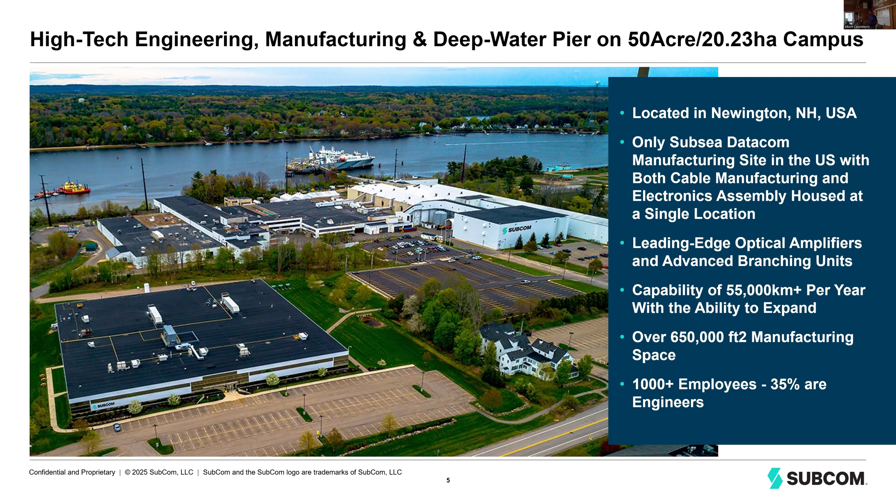So we're right up the road. We have over 1,000 employees, many of them engineers. But we don't just make cable, we also install cable, and I can talk about that here.

Our experience: over 1,000 employees, innumerable patents, so many networks, and we've deployed enough cable to circumnavigate the globe 25 times. I believe we've just hit 1 million kilometers deployed. We do things in kilometers.

Again, I myself have had a journey where I landed cables, I've been to over 40 countries landing cables. We also have 9 ships and a plethora of other material like ROVs and plows to help us protect, bury, and inspect our lines.

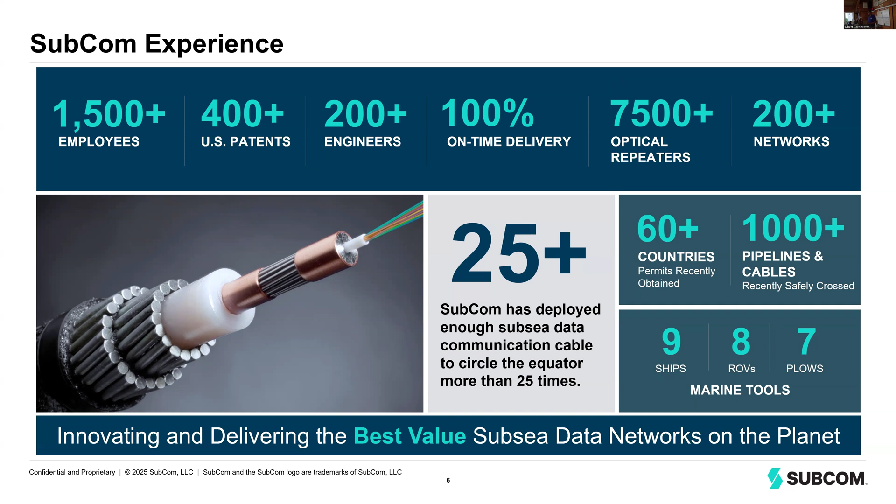Now, what does it take to build and install a subsea network? It's a massive effort.

We have, from the very beginning to the very end, so many different diverse backgrounds, majors, people coming from different walks of life, serving key processes and roles in any of these fields you see above.

So you have engineers doing modeling of these subsea networks. You have optical design. You have desktop study, which is more of a marine study - sonar, survey work.

You're doing liaison with local fisheries, because we don't want to lay these cables anywhere there's anchorages or marine mammal sanctuaries, things like that. So all this needs to be planned ahead. We need to ensure that wherever we're laying our cable from point to point, we're avoiding things that can hurt the cable or the environment.

Then from the planning stage it goes to permitting, a massive permitting effort. You can't do anything without having your proper permits in place to lay cables, especially considering we are in a very delicate marine environment. It's a beautiful island here, Avalon and Appledore. We need to have all our permits in place before we do anything, and survey as well goes into that. Once we have a general idea of where our route is, we have folks do survey.

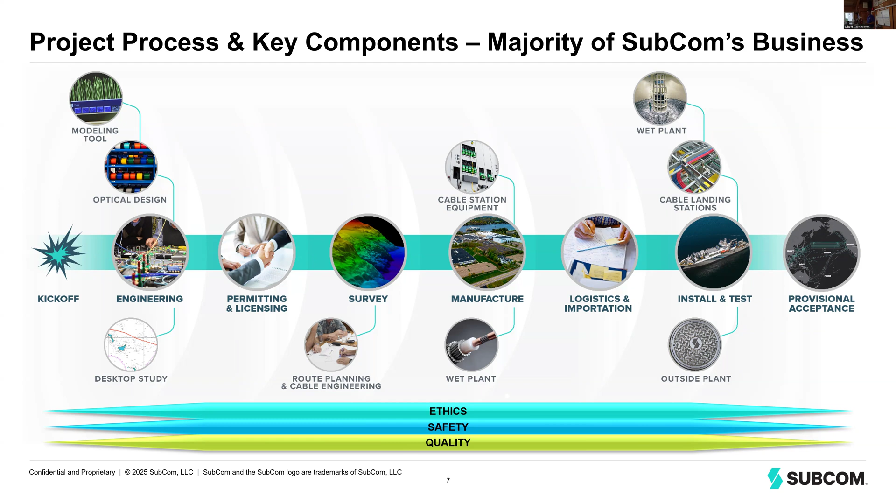Then it goes to our manufacturing phase, where we again get into who we are and all the different people we involve in this project. All the manufacturing that happens here in New Hampshire. We also have our logistics folks, our vessel folks who do the installation themselves, like me, who do the installation on shore. And eventually, after it's all installed, we need subject matter experts who are able to test it, so photonics engineers, people who have a background in testing and things like that come in. But what I want to restate is that we may have folks from different backgrounds, from environmental engineers, electrical engineers, and techs.

You may start your career in one specific area, but as a material science engineer myself, I've been able to jump around and do different things at SubCom. All the study paths you see on the left, there's no direct line to something analogous at SubCom in the long term. You can jump around. You have permitting people who have marine backgrounds. You have contract management people who started in shore ends. You have any number of different pathways in a company as big and diverse as SubCom, with all the different things that let me do every day.

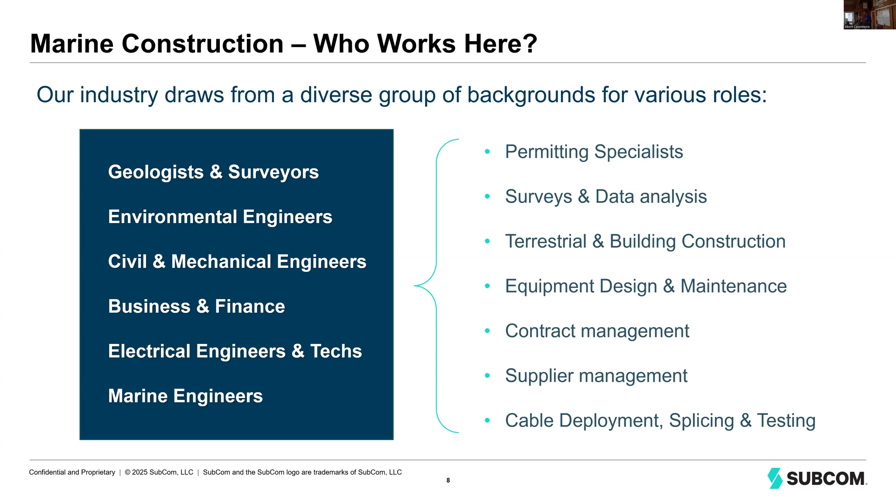In fact, currently we even have 12 summer interns from UNH, although I understand we have a lot of different universities and locations represented here on the rock. SubCom's hired multiple UNH interns, but also interns from other colleges in the area and out of the area, from engineering backgrounds, mechanical background, oceanographic studies, even business administration. As a company like SubCom, you have the ability to start and jump around to any number of cool things.

So Chris and Jen and some of our folks, Debbie Brask, some of the folks at SubCom, we really love our relationship with UNH and with students who have been interns and even have stayed on to work at SubCom for many years.

Overall, SubCom as a company is one of the leaders in these subsea fiber optic systems, manufacturing and installing them. In fact, this island is part of an oceanographic system that has hydrophones on it, listening for nuclear tests. So it's not just telecommunications cables, it's anything that needs a connection through the oceans. We're able to keep them. Okay, that's who's up.

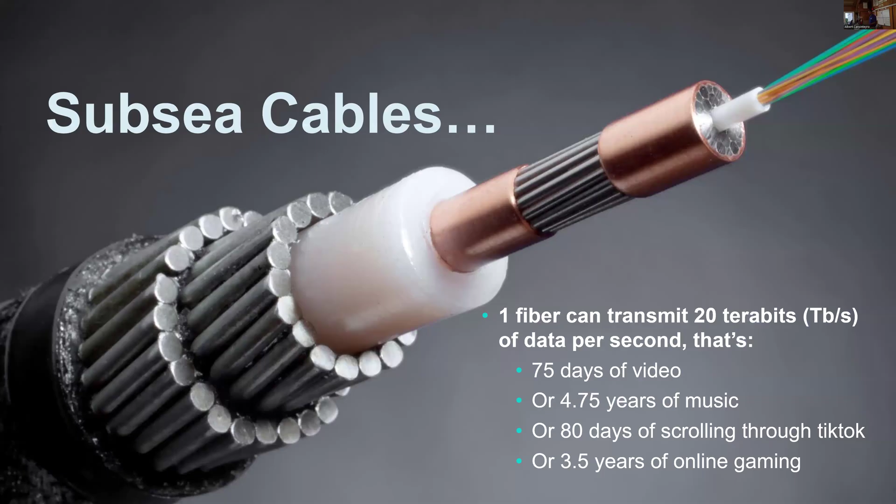That allows us to communicate so much more data than just going one signal at a time, because all these signals are traveling at once - this is all live, real time. So what that means for the internet in general is one fiber can transmit 20 terabits of data per second. As you can see on the board here, that's 75 days of high-def video, 4.75 years of music, 80 days of scrolling through TikTok nonstop, or 3.5 years of online gaming, per second, one fiber.

Now, our cables can have 4 fibers, 12 fibers, 24 fibers - what are we up to now? 24 fibers. So that is the backbone of the internet as far as getting your ones and zeros from A to B.

So you can cram as many channels as tight as you can, and your only limits are a bunch of weird physical interactions that happen, plus all the technology you have on either end to decode and separate these signals into their separate channels. If this interests you at all, go grab your resident physicist or optical engineer and shake them and ask them to tell you more, because it's really, really cool stuff. It's something I didn't understand before I started the job, but now I have a little bit of understanding.

The fiber, each fiber, you've probably seen the fiber optic samples on your desk, the size of a human hair. So we have DA cable landing on the beach. How do we make it? We get fiber, and this is all happening at our plant here in Newington.

We get fiber on spools. We take that fiber and put it inside a loose tube, gel-filled, that protects it from any water leaks or things like that. If the cable gets hurt or breaks, it's going to slow down the watering. This is the loose tube, you can probably see it on your samples, a very small portion of it.

After it gets through the loose tube, it goes in an armor wire packet, and then it gets a copper conductor pressed and welded around it. The copper conductor is there to power the amplifiers that I showed you.

Then it gets a layer of polyethylene, the white plastic you see on your cable samples. That poly package is the cable center package. That's the cable that's in deep water. You don't need anything other than that. Everything else we add after that is only for protection we need near shore, for the event of anchors or excavation or something.

The armor wires get spun off onto massive spools. This is happening 24/7 mostly in our cable factory in Newington. We've made the most cable we've ever made so far this year. Then ultimately it gets wrapped in a fabric wrap with some tar, bitumen kind of substance to give it some handling characteristics, so when we lay it, we have a good grip on it.

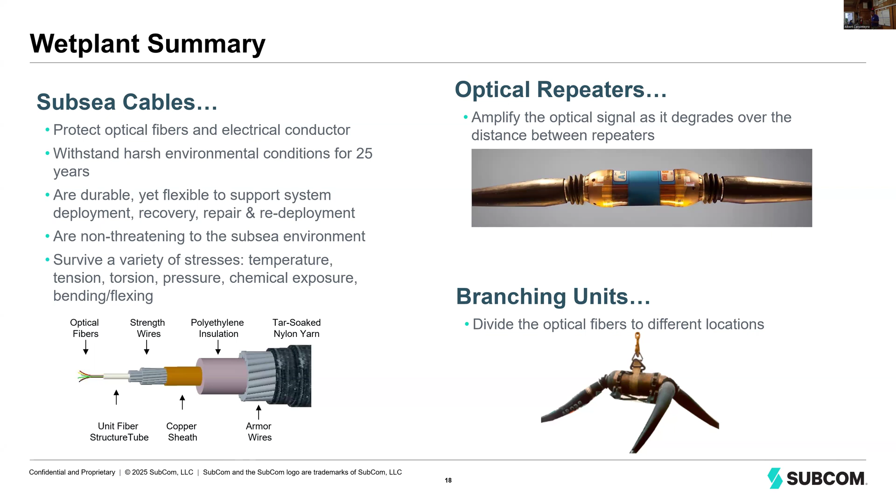So yeah, building networks involves also the repeater manufacturing that we do at the factory, some of the network assembly and some of the testing. It's a massive facility, and it's pretty much all this stuff.

So I haven't lost everyone yet. Let's talk a bit more about marine installation. We've built this network, surveyed it, manufactured all these repeaters, and we have all the design down. We know how many bits are going here and there, what the ratio is, how much each branching unit needs as far as capacity. We've done all that. Now we need to put the cable on the vessel, land it like we did here in April, and then lay the cable and repeaters on the seabed. Most of the cable and repeaters, again in deep water, are all laid on the ocean floor.

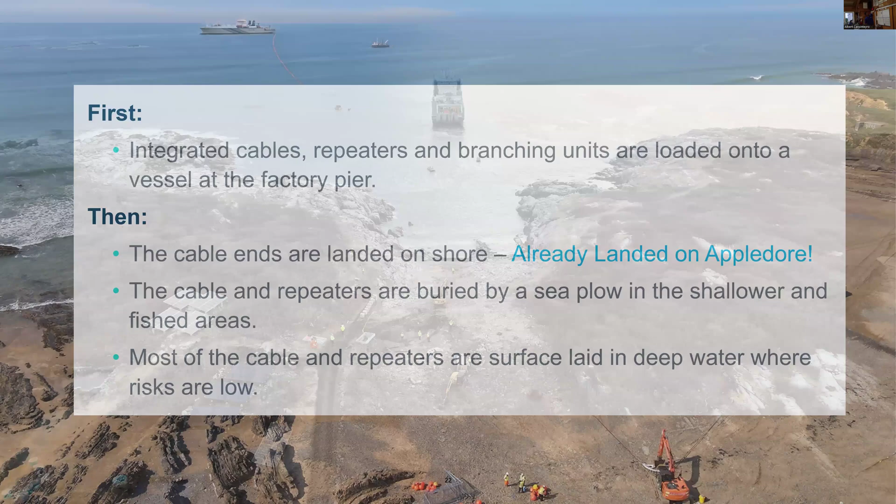This is actually a shot from April, where I'm out here on one of the small boats, to the left, down here. There's Broad Cove. On the left-hand side you'll see a small concrete square, to the right of the little orange excavator, that is the beach manhole. So that's point A, as it were.

And the cable ship offshore is currently feeding us a messenger line. Divers have come out to the boat, grabbed a line, a hauling line, and brought it to shore. We're waiting for our excavator with our winch to start pulling the cable. So we've got the messenger line in.

Then the end of cable is attached to the messenger line. The cable is then hauled in. I've got a couple other photos of that coming up. The divers are there.

It's a long day, but landing day is probably one of the most important days for me as a shore end guy. It's the culmination of a year plus of planning. We're not just doing this in beautiful sunny New Hampshire weather in April—sometimes we're doing it off the coast of some tiny atoll with a hurricane coming in. You have to plan these things much in advance for every condition.

So in any case, there's the cable vessel. We have 6 of those and 3 others, of a different class of cable vessel.

And here is the cable encased in some protecting pipe coming into shore, floated to shore. As you can imagine, you wouldn't want to drag the cable on the seabed with the winch wire—you would chew up the cable and also create a lot of tension that you don't need.

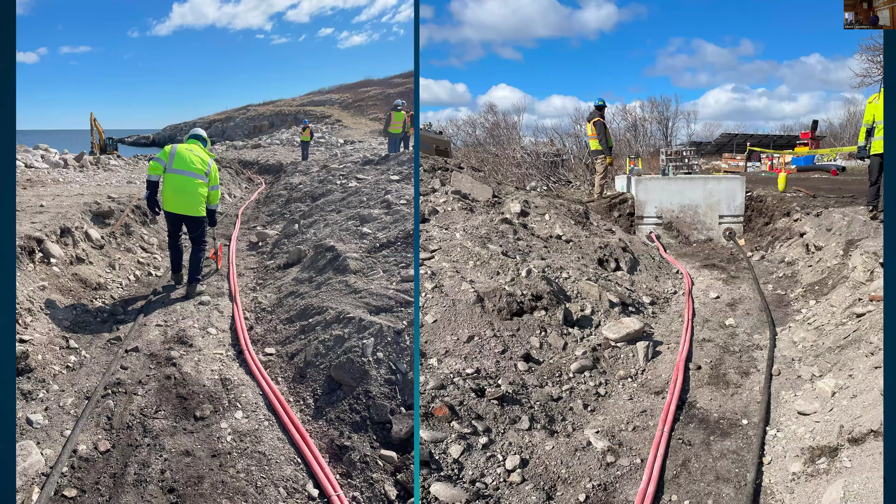So there's the cable coming into shore. We're not just going to lay the cable on the surface so that anybody can come around, kick it, bury it, punch at it—we don't know what people are going to do with it. We need to bury these cables on the shore, so we excavated as much as we could. There are massive boulders in Broad Cove, and the excavators did a great job of pulling those to the side and getting them out of the way so we could get the cable in.

Those are buried out there as well. Once the cable is on the beach, we need to send divers down there to cut all those floats. We want that cable to sink—cable's not buoyant, it doesn't float. But now that we've got everything aligned, so we have a string of floating cable from shore to ship, we can cut those floats and the cable's just going to sit down.

Sometimes divers are out there working, sometimes they don't see much, and sometimes they get visited by penguins and other sea life. And this was not in Broad Cove—admittedly, no, this is not in Broad Cove. I think I asked the divers what they saw, and they said rocks, mostly fish and crab, yeah, okay.

So we've done the shore end. We're still on our journey of building this network. We've done the shore end, and now it's the ship's turn to do all the work.

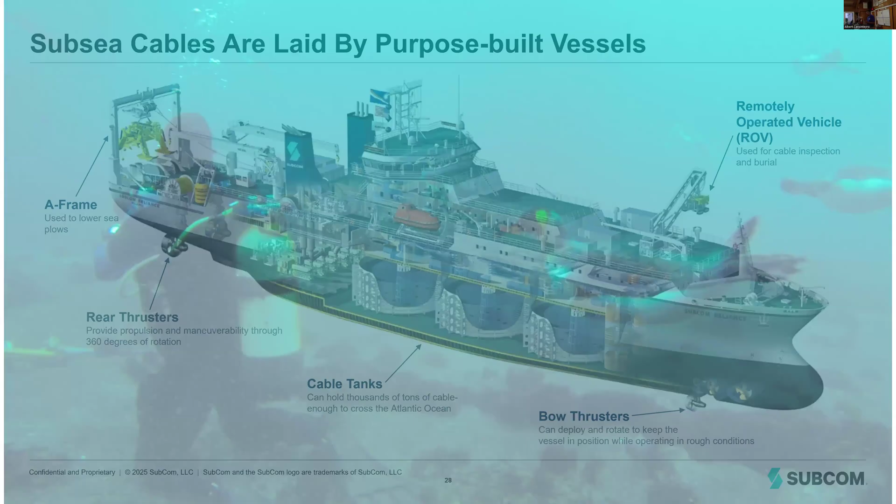So these are cable ships, a cutaway version of it. Here we have DP2 vessels—DP2 meaning that they're able to hold position incredibly well, in some cases within meters or feet, depending on conditions. These vessels have azimuth thrusters; they can hold their heading and position and really stay on station wherever they are, which is critical for us because, as you can see, they were really, really close.

Closer than some folks might think a ship should get to shore. A lot of times they're not that close. This was a great day, nice and calm, so we were able to pull cable in very quickly. Obviously, if we're a lot farther away, it's going to take longer to pull in. So these are our vessels.

For cable engineers, when I first started, you could be out there a couple weeks to a couple months doing these major cable lays. I've been told it's a lot of fun. I get seasick, so I was a shore end guy right away—they gave me an option, shore or ship, and I said shore.

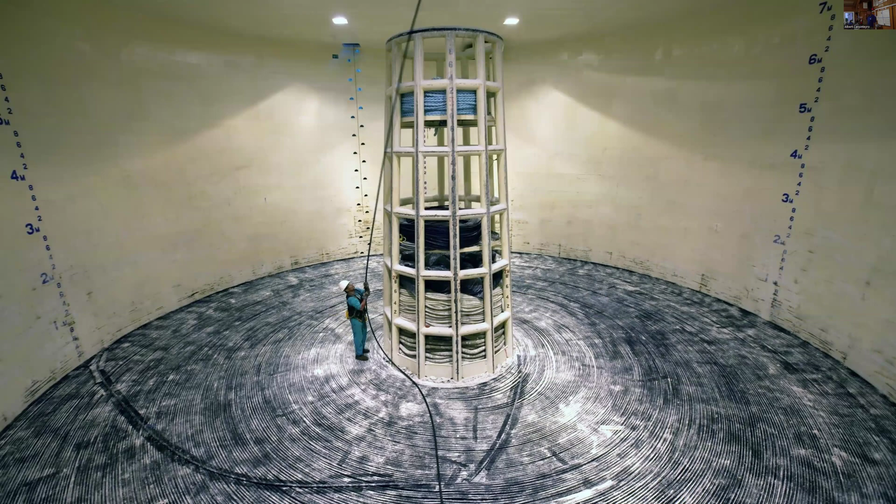In these cable ships, we hold enough cable to do a transatlantic lay. So we have enough cable capacity. There are 3 cable tanks you can see in the cutaway, and this is the size of the cable tanks.

This all still needs to be done by hand - the proper spooling or loading of the cables. Someone needs to make sure all those different cable plates are right. You guys have extension cords, dozens of cable chargers, you put them in your bag - what happens? They get all tangled up. It's impossible to keep it straight.

We have to lay the cable in this tank to be flaked in a certain way, so that when it comes out of the cable tank, there's nobody in there, nobody needs to touch it. It just comes out nice and clean, like it was coming out of a fresh box of rope. So that's a fun job you can do at the factory, if you like listening to podcasts.

So the cable ship's doing its job. It's loaded its cable, we've landed the cable. I mentioned very early on that the first transatlantic cable didn't last very long at all because they didn't know about the mid-Atlantic ridge.

For those of you who've studied this, the mid-Atlantic ridge is a mountain range in the middle of the ocean. When laying a cable from the UK to, say, Halifax, Nova Scotia, and you don't have X-ray vision, you can't see the seabed - you assume it's just a flat, sandy bottom. If you're in 1886, that's what you'd think. Now we know the mid-Atlantic ridge exists. If you're laying cable without knowing about this, you're suspending massive sections of cable, potentially miles and miles, just hanging between peaks on mountains. How long do you think this is going to last?

About 2 weeks - yeah, that's how it was. Oddly enough, you might think cables back then were built with weaker material. To a certain extent that might be true, but ultimately cables are more or less the same as far as some of the high strength steel and composition. A cross section of cable from the early 1900s, with the exception of the fiber, is going to look very similar - armor wires, some nylon wraps on the outside, and the center insulator might be a different material, but it's going to look nearly identical.

But they didn't know about the Mid-Atlantic Ridge. They were doomed from the start because they didn't have enough survey data.

So going back to the beginning of my talk, where I talked about all the different engineering involved in laying cable, I think I'd have to kick this to Chris here on this specific equation, which I'm sure he's got. So you're laying cable.

If you're laying cable on a flat seabed with minimal undulations, good for you, you're having a good time. You're laying cable fast, paying out at near constant speeds, making slight adjustments. On top of the cable deck, the cable engine, you have a cable counter. You also have your GPS information to understand your position, so you know how far you've moved and how much cable you paid out. In a flat world, great, 1-to-1. That's not how the world works.

So you have cable contours, all these different seabed contours - you have the Atlantic Ridge. What do you do? You have to adjust either your speed or your cable payout to match the seabed contour. You want the cable laying nice and neatly on the seabed. You don't want it too slack, because if it's too slack it'll kind of knot itself, and if you keep pulling it's going to break. So you have to adjust your speed, adjust the cable payout, and it's all about matching that angle of the cable lee off the back of your deck.

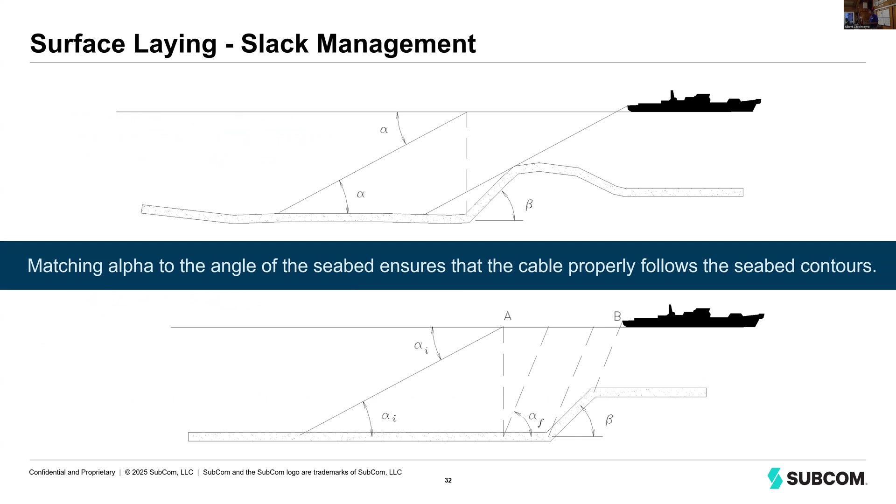It's all done with modeling software, and all the ROVs and survey data go into it to ensure a properly laid cable. That's a whole group in itself at SubCom, where we take the survey data from all our pre-installation work and model it using cable laying software. We're able to tell the ship engineers how much cable to pay out and where - that's the design validation. Then at the end of the day, the cable ship can say, well, at this position, I should have this on the cable counter to make sure I'm laying the cable fine.

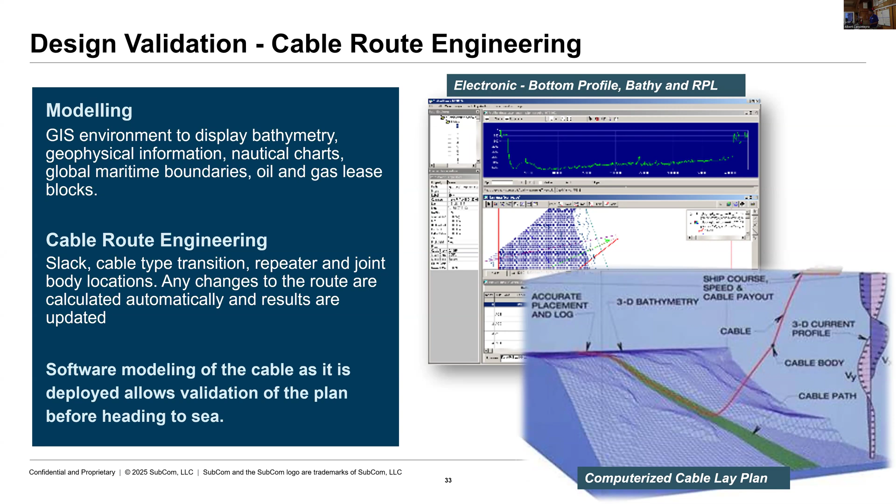So in summary, for the main lay vessel, different types of cable, different cable weights, and different slack scenarios require laying at different speeds. You need to avoid large suspensions, like miles and miles of cable suspended between two mountain peaks on the seabed. Closer to shore, we need armor cable to protect it from fishing boats, anchoring, and anything like that might hurt it.

What you're seeing is a photo of a long ROV survey data plot, where we have all the different areas of interest that we're trying to avoid, to have our cable lay on the flattest seabed, being modeled in real time.

So you've laid your cable. Now in some cases we've got to go check it, or we've got to go bury it. In some cases we can bury it with a plow, that's its own process I don't think I can get into right now. But the ROV inspections, we have to send ROVs down all the time.

Does anyone here on the island have to deal with any ROVs, or drones, or anything like that on the seabed? No? Okay, you need to get into that. All right, so ROV inspection.

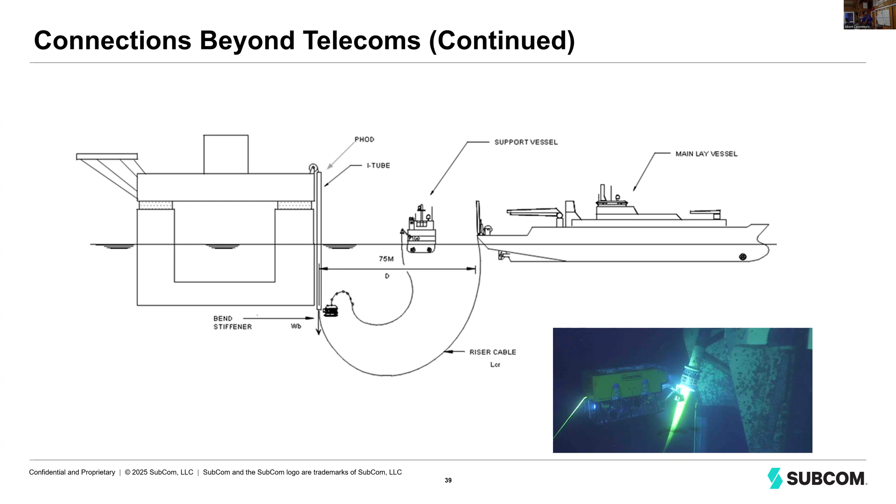There's an ROV inspecting the bottom of the I-tube, watching the cable go in. That's what I did on offshore oil platforms, and now bringing it back to Appledore. So here at Appledore Island, we managed to land the cable. In another couple months, we're going to come back and put the deployment pallet down.

The deployment pallet is a fiber optic converter. So what it does is take our cable and change it into something that's kind of plug and play. You can actually plug in fiber optic connections at great pressure, at great depth, with the use of our mud mat here. So our cable comes in on the left, and those plugs you see are the termination point of SubCom's work here at Appledore Island. What you're going to do is have a sensored array that plugs in with a hose and gives your array power and fiber optic connection all the way back to shore.

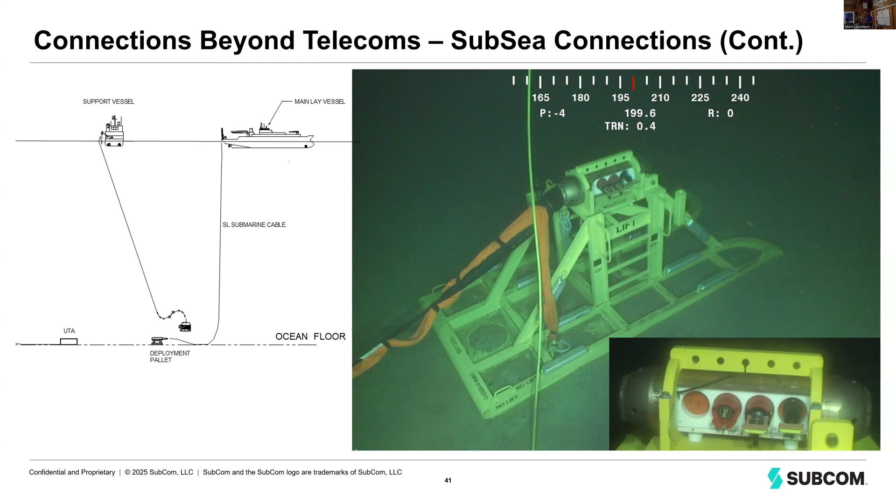So I believe you'll probably have some thoughts on something similar or something like that in the future. And that's all I have to share with you today. So thank you so much for your attention.

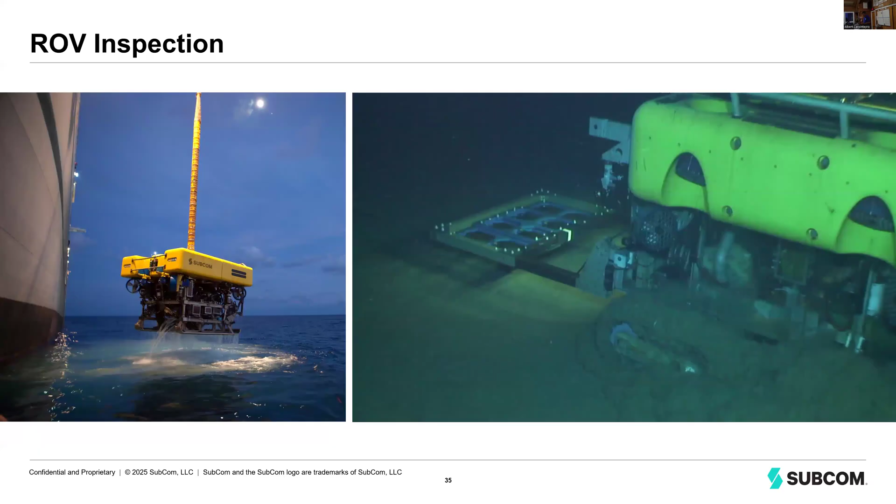Hi, super interesting talk, thank you. I have a question about the repeaters along the cable. They're spliced into the cable? Yep. So how many of those, given say a kilometer of cable, would there be to boost the signal? So depending on the system capacity, you might have a repeater every 90 to 100 kilometers, something like that.

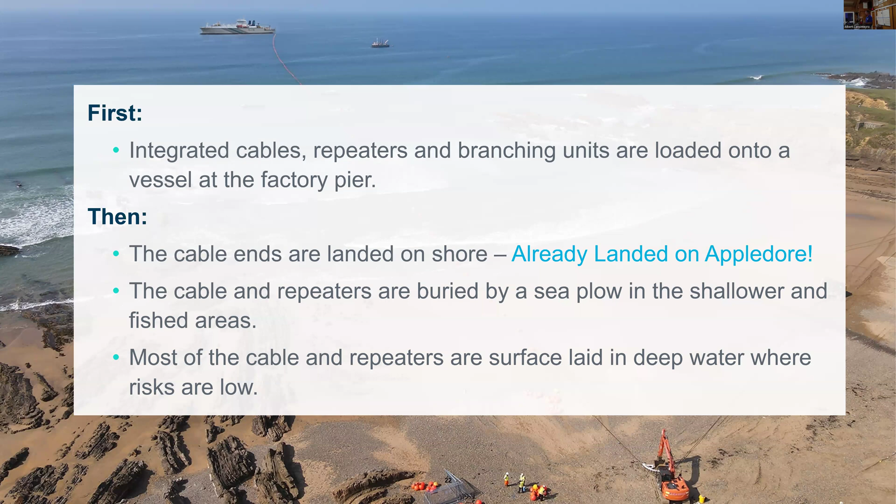Oh wow, so there's a lot when you're trying to go from LA to Fiji. That's why we're in the sweet spot in that spectrum where the application works and the loss is less.

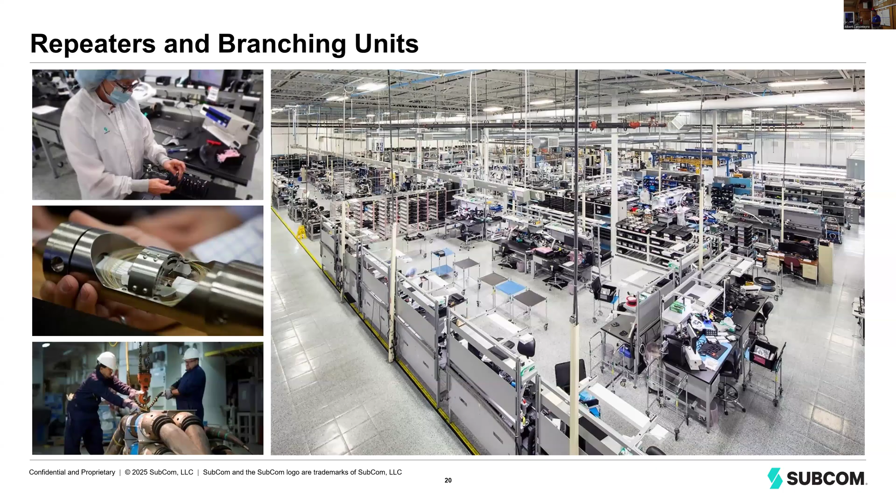Hi, thank you for the talk. I was wondering how you accommodate spreading at the mid-ocean ridges. Do you put more of it down, or like you said, you didn't want slack? Great question, that is the dance. You don't want too much slack. Depending on the cable type, you have to lay it with a little bit of tension back so it doesn't have muscle memory and just twist on itself.

So it's the delicate dance that you're doing with a touchdown. You're in really deep water. Your payout and your speed are all you can really adjust as to what the cable is doing. The cable might be touching down on the seabed a couple miles behind you because it's that far away. So it has to do with the quality of the survey data, the planning of our lay plan, and the experience of the cable engineers on deck, also what tensions and things we're experiencing in real time.

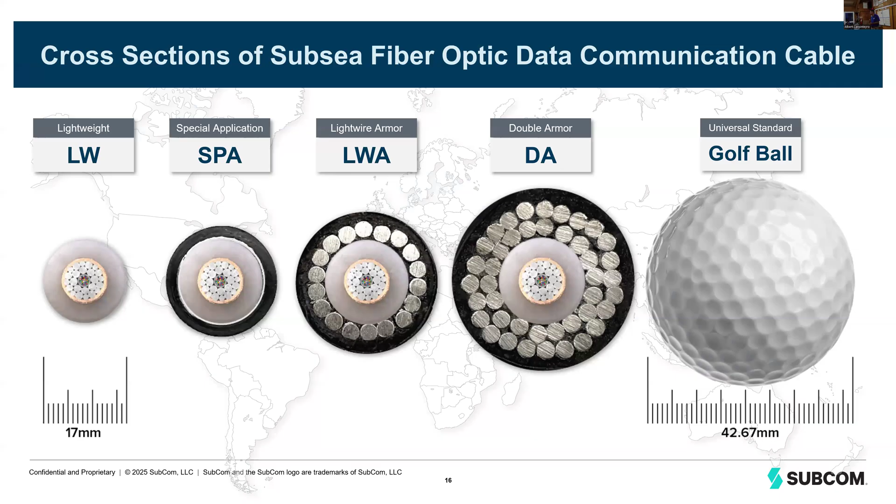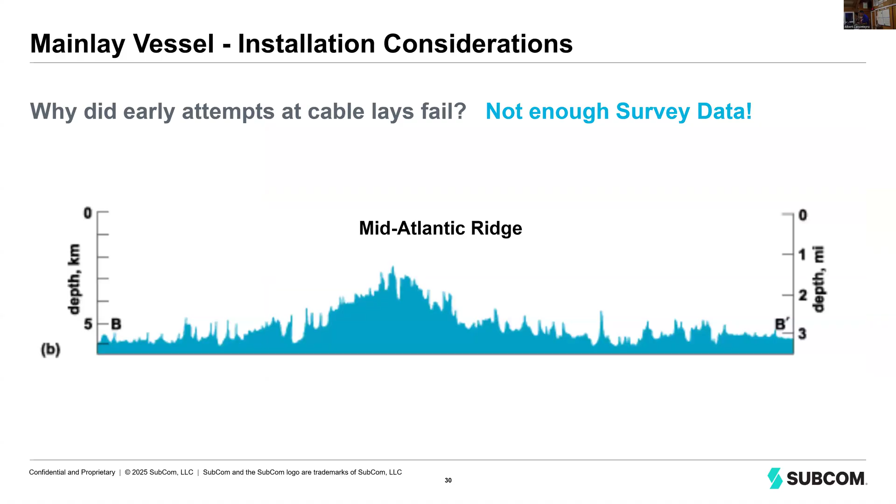Chris, anything to add to that? So, real quick, just to visualize what I meant earlier, that distance between where the ship is and where that touchdown point is could be miles.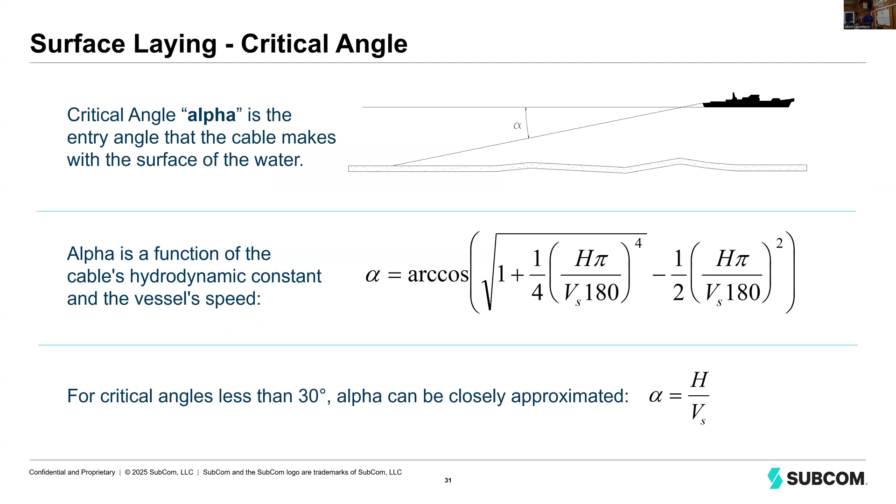Thank you so much for the talk. I was curious about the cable testing process. Do you synthesize from the spectrum data you were showing earlier, or is it something different? No, that's right.

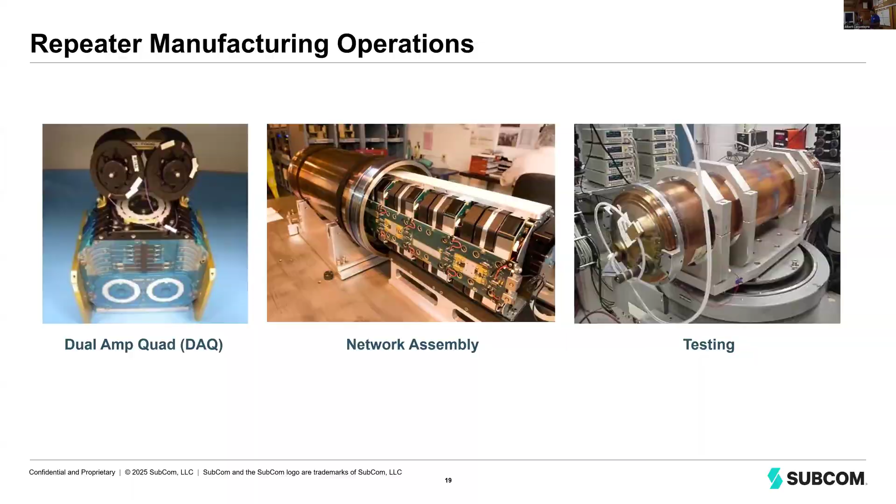Sorry, okay. Hi, so what does maintenance on these cables look like, or how long do they last in general?

These cables are designed to last 25 years - the entire network could last 25 years. And if there's a cable break, we have a process: we can go pick up the cable, splice it back together, add a little cable, and lay it right back down, having it working in a couple days, if we're there.

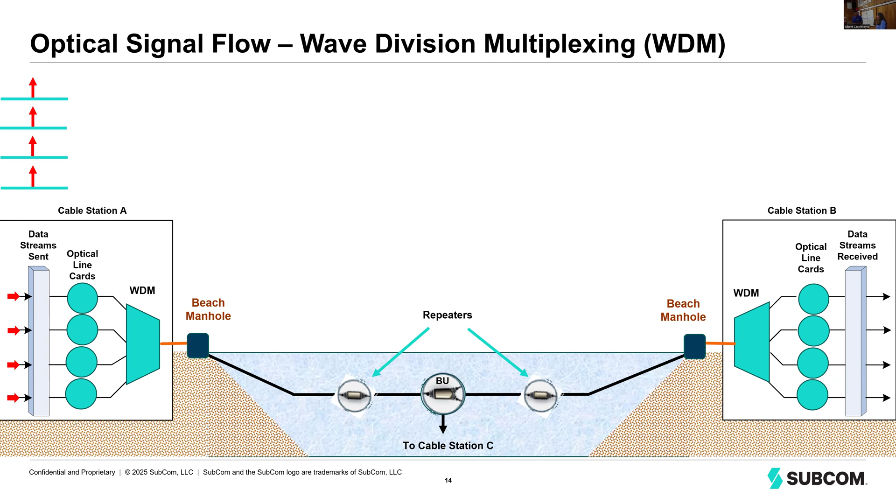I want to thank them for coming. This was fascinating, really, really cool stuff. We can't wait to—it's all the things we've been seeing in Broad Cove and the questions we've had about what was here and how this was working. Thank you so much for this.